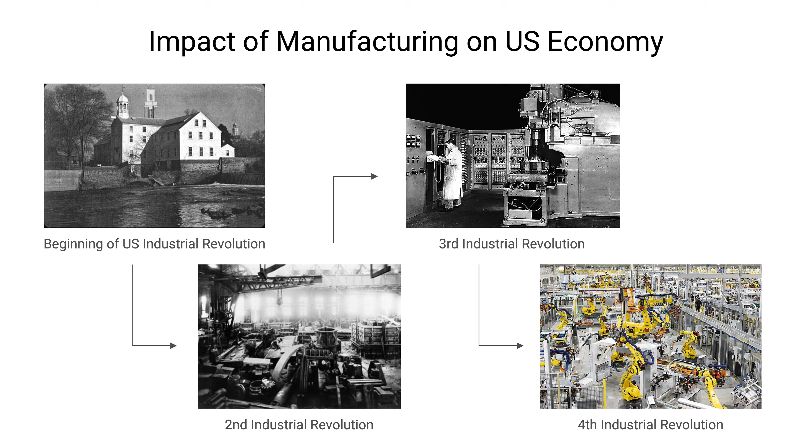IIoT, or Industrial Internet of Things, refers to the use of connected devices, sensors, and systems to improve industrial operations through real-time data collection, analysis, and automation. The implementation of IIoT into the manufacturing industry is important because of its ability to boost the efficiency of any manufacturing process. Although there may be higher upfront costs, the ability to have predictive maintenance, energy management, and improved product quality make the benefits far outweigh the higher price point.

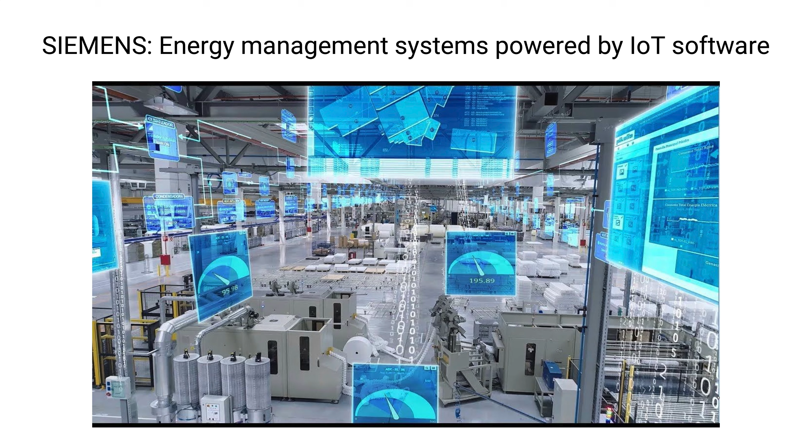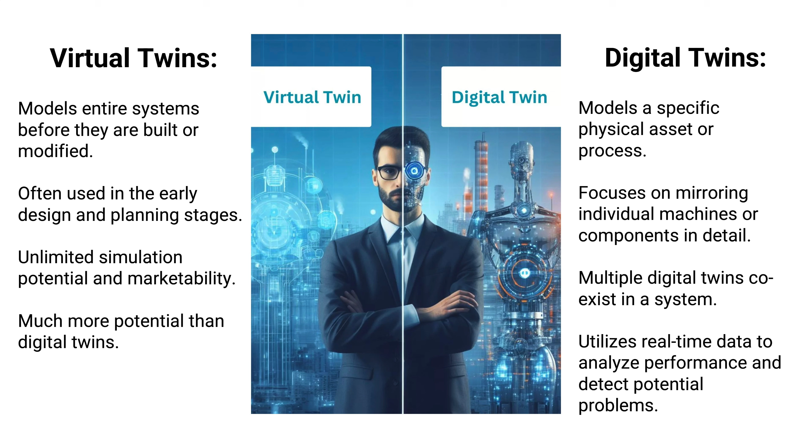Virtual and digital twins are two revolutionizing technologies that are changing the manufacturing game. Both utilize IIoT to provide them with the necessary data infrastructure needed to simulate accurate models. Virtual twins model entire systems and are often used in the design and planning stages. Its unlimited simulation potential and marketability make it a much stronger tool than digital twins. However, digital twins does have its place. It models specific components of a process and focuses on perfectly mirroring those individual machines. Similar to virtual twins, it utilizes real-time data to analyze performance and detect potential problems.

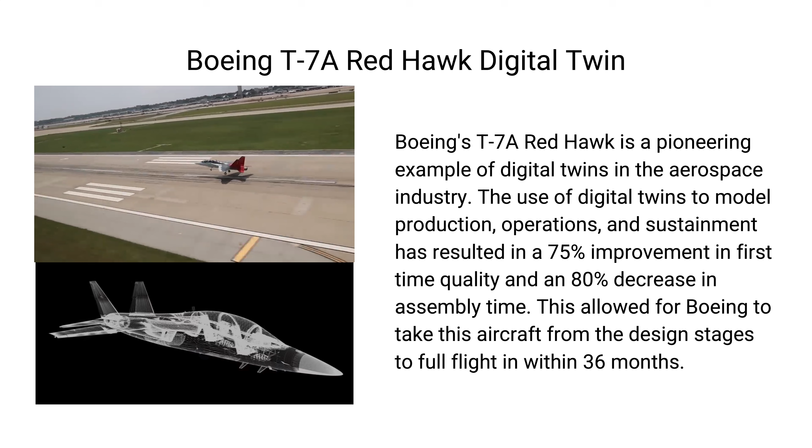Boeing's T-7A Red Hawk is a pioneering example of digital twins in the aerospace industry. The use of digital twins to model production, operations, and sustainment has resulted in a 75% improvement in first-time quality and an 80% decrease in assembly time. This allowed for Boeing to take this aircraft from the design stages to full flight within 36 months. This is an incredible feat that has never been seen before in the aviation industry, and it is due to the power of digital twins.

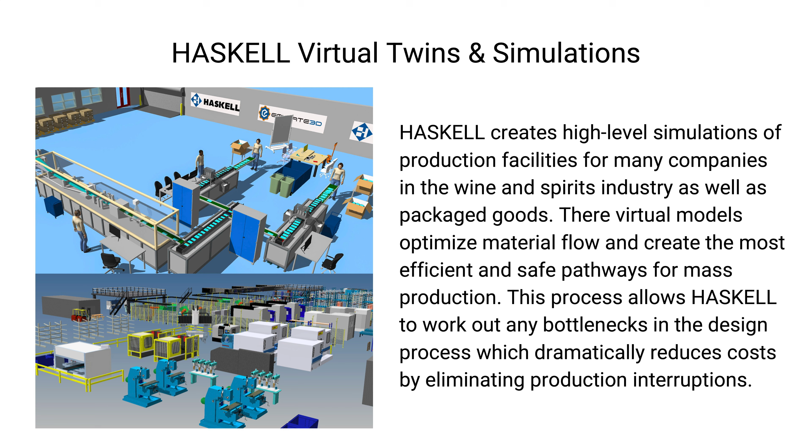Haskell follows an EPC product delivery, which stands for Engineer, Procure, Construct. They utilize virtual twins to bring entire manufacturing facilities to life, and then market it to a large corporation in a cost-effective manner. Haskell creates high-level simulations of production facilities for many companies in the wine and spirits industry, as well as packaged goods. Their virtual models optimize material flow and create the most efficient and safe pathways for mass production. This process allows Haskell to work out any bottlenecks in the design process, which dramatically reduces costs by eliminating production interruptions.

Every mechanical engineer has fantasized over Tony Stark's out-of-this-world technology in the Iron Man movies. However, that technology is becoming a reality and has multiple implications in the manufacturing world. What is augmented reality? Augmented reality is an interactive experience that enhances the real world with computer-generated perceptual information. How is it applied in manufacturing? AR can be used in manufacturing to assist field technicians with assembling components. It can also speed up quality inspections and simplify inventory management. BMW, a well-known German car brand, implemented AR glasses into their Munich pilot plant.

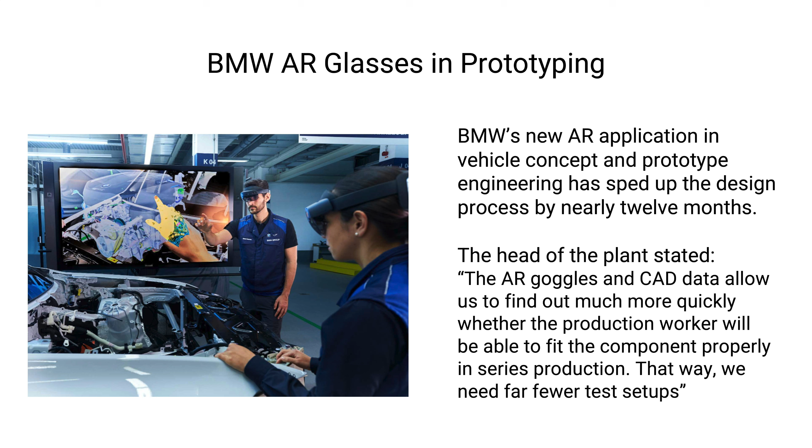BMW's new AR application in vehicle concept and prototype engineering has sped up the design process by nearly 12 months. The head of the plant stated, "The AR goggles and CAD data allow us to find out much more quickly whether the production worker will be able to fit the component properly in series production. That way, we need far fewer test setups." The implementation of these goggles yielded a 33% reduction in error rate and a 22% decrease in inventory identification time.

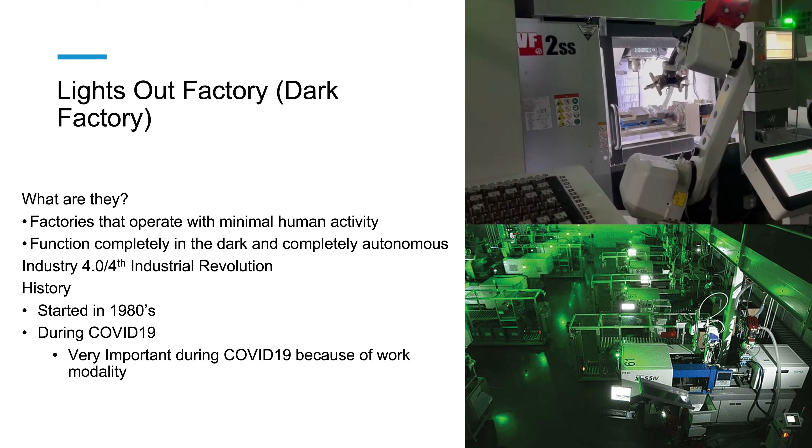The next topic is lights out factories or dark factories. So first, what are they? They are factories that operate with minimal human activity and they function completely in the dark and completely autonomous. This is part of the Industry 4.0 or the Fourth Industrial Revolution. The history of lights out factories: they started in the 1980s and they were very important during COVID-19 because of the work modality issue.

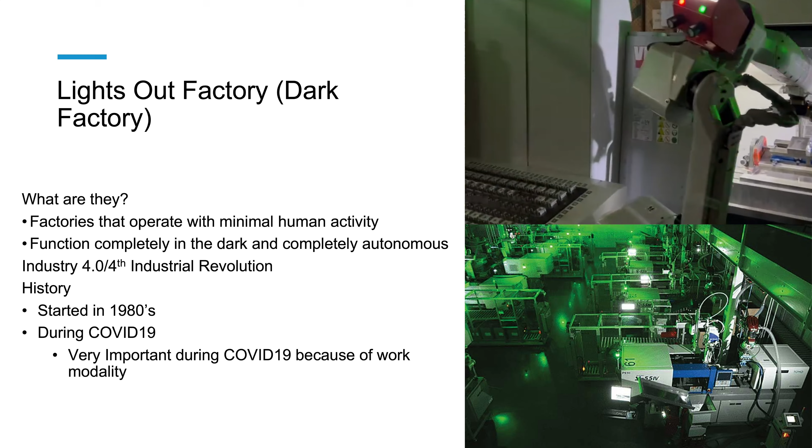The capabilities of the lights out factory are that it can reduce accidents and increase worker safety, improve operational efficiency, reduce scrap and rework, drive more advanced maintenance strategies, and have higher value tasks for workers. The limitations are the loss of flexibility, as there is no way to make an in-the-moment change or respond quickly to an unexpected situation. There can be higher costs with the startup due to the need for more machinery.

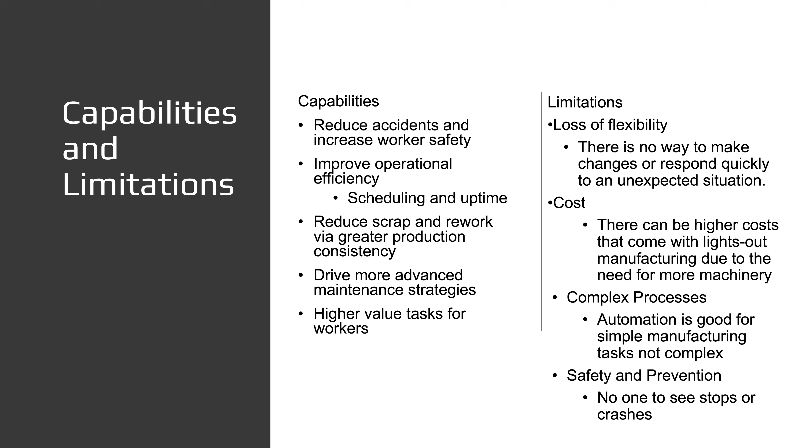Automation is only good for simple manufacturing tasks, not complex processes. And safety and prevention, as there is no one to see stops or crashes if there is nobody on site. Some examples are Fanuc. They've had lights out factories since 2001 and they can run for 30 days without human intervention. Philips has a razor manufacturing site that is completely automated and only 9 staff members oversee quality. And there are many others like Ford, Amazon, Siemens, etc.

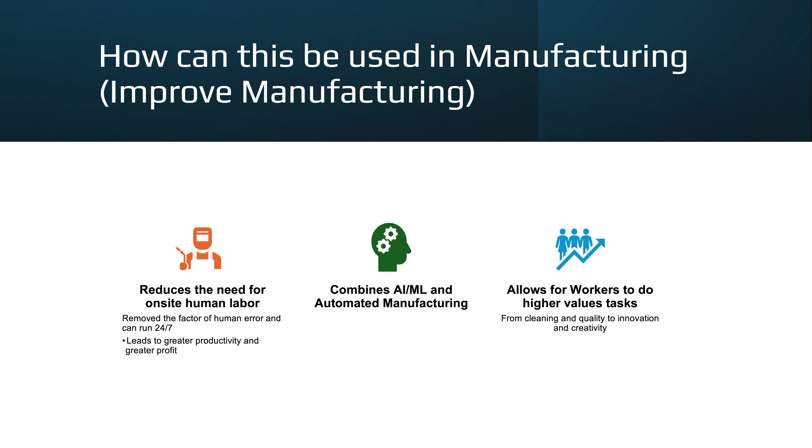How this can be used in manufacturing or improve manufacturing: this reduces the need for on-site human labor, and this leads to greater productivity and greater profit. This combines AI and machine learning and automated manufacturing. This allows for workers to do higher value tasks, from cleaning and quality to innovation and creativity tasks.

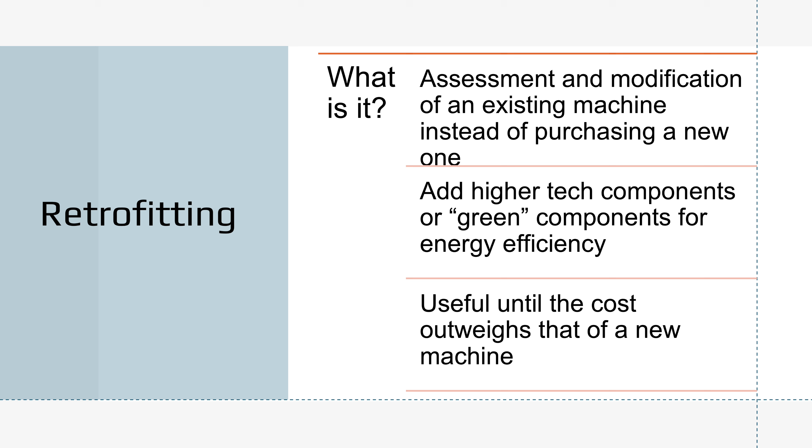Next is retrofitting. Retrofitting is an assessment and modification of an existing machine instead of purchasing a new one. This is in order to add higher tech components or green components for energy efficiency. And this is a very useful method until the cost outweighs that of buying a brand new machine. Some considerations that go into retrofitting to ensure that it is something that will allow us to make better and better products are the long-term business impact, whether it's worth it later down the road.

The time investment, as this will take a lot of time to upgrade old machinery to match that of current generation machinery. There are engineering challenges, costs, as it could cost a little bit more to rebuild versus retrofitting the machine. And then, as I just said, the rebuild versus retrofitting, whether or not retrofitting is actually the best option in this situation. And Industry 4.0 compatibility, as one of the main goals of manufacturing is to strive to hit Industry 4.0 in all of our machinery.

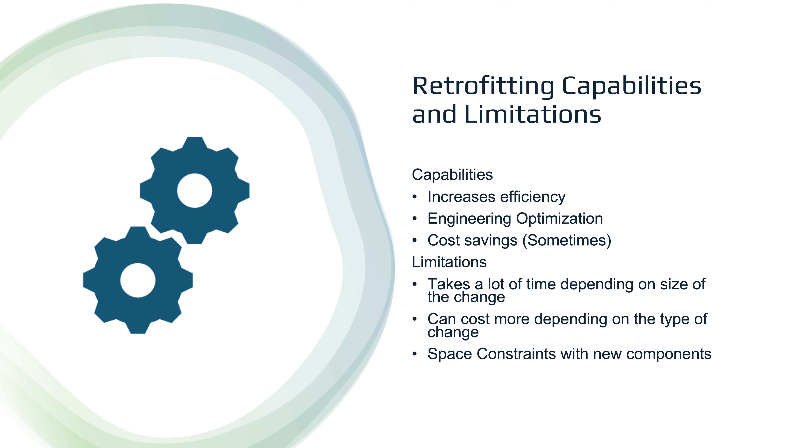The capabilities of retrofitting are that it increases efficiency, it is engineering optimization, and it does have some cost savings sometimes. The limitations are that it takes a lot of time depending on the size of the change, can actually end up costing more depending on the type of the change, and there are space constraints with the addition of new components.

But if you have these excitement models or attractive models or features, if you do those very well, you will get very high satisfaction. And also with time, all of the satisfaction of all of these emotional response types does decrease over time. The 5 emotional response types are must be or must have basic features, performance features, attractive features, indifferent features, and reverse features.

The Kano model capabilities and limitations is that it does save time and money, it helps identify priority areas, and it groups the best features, and it also is a great way to increase customer satisfaction on the products that you are manufacturing. The limitations, though, is that it is predominantly quantitative, not qualitative. It requires a lot of analysis, and it also can be very hard to manage when you have products that have multiple features and multiple different types of features.

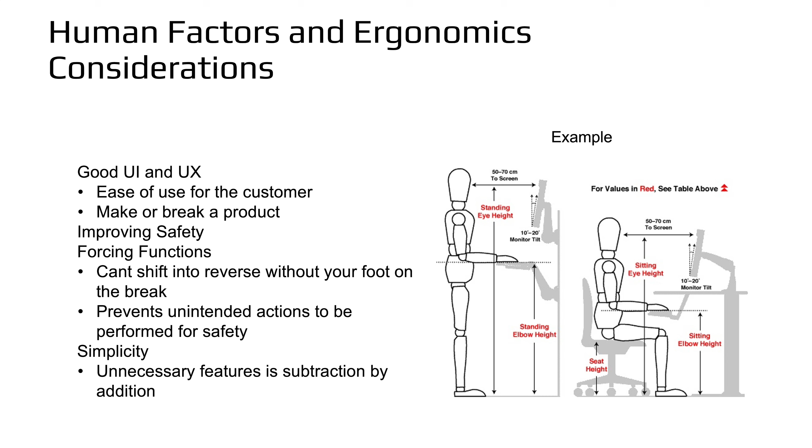Product benchmarking involves comparing performance metrics of a product against competitors or industry standards. These metrics and comparisons provide valuable insight to help optimize current products and create improved future products. Benchmarking is important because it identifies performance gaps and areas of improvement. Furthermore, it helps refine product features and customer satisfaction to help stay competitive in the market.

There are multiple types of benchmarking such as internal, competitive, or performance, functional, generic, and many others, all of which contribute to gaining insight and identifying areas for improvement within a product, industry, or even a company. These techniques can be leveraged to design and manufacture better products by setting clear performance goals through comparison and evaluation with competitors or benchmarks.

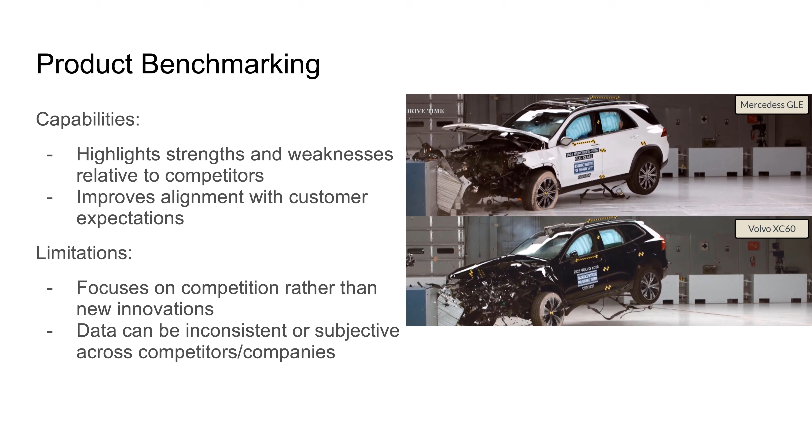Capabilities of product benchmarking is that it's able to highlight the strengths and weaknesses of a product relative to its competitors, providing useful insight into the capabilities of the product. Furthermore, it can help align with customer needs as it highlights opportunities to differentiate products that better fit customer expectations. Some limitations to product benchmarking is that the obtained metrics may focus too much on competition, hence hindering the development of new innovations. Furthermore, the obtained data can be inconsistent through different companies or competitors, thus sometimes it is difficult to directly compare a product to another.

The newest iPhone 16 showcases Apple's latest innovation through the new camera control button, action button, as well as Apple Intelligence. One key innovation is the camera control button, as it allows users to quickly access the camera app and adjust camera settings like exposure and zoom, making professional quality photography more accessible. Apple Intelligence is another innovation new to the iPhone 16 that integrates AI capabilities into the device, enhancing Siri's functionality for improved interactions. These new features showcase Apple's innovation techniques for user-centered design as it enhances user interface and functionality. These innovations also boost market differentiation by setting the new iPhone apart from competitors with the addition of the new camera control button.

Despite the benefits new innovation brings, it could come with certain challenges such as increasing complexity. The new camera control button may confuse new users as it has a learning curve to fully utilize. Furthermore, the newly released AI functionalities bring the same difficulties as well, due to having to learn how to use Apple Intelligence. Additionally, the delayed availability of Apple Intelligence has drawn criticism, and the camera control button has sparked debate about its practical value despite the innovative incorporation of a digital camera into an iPhone. Here are the sources used for Project 4.